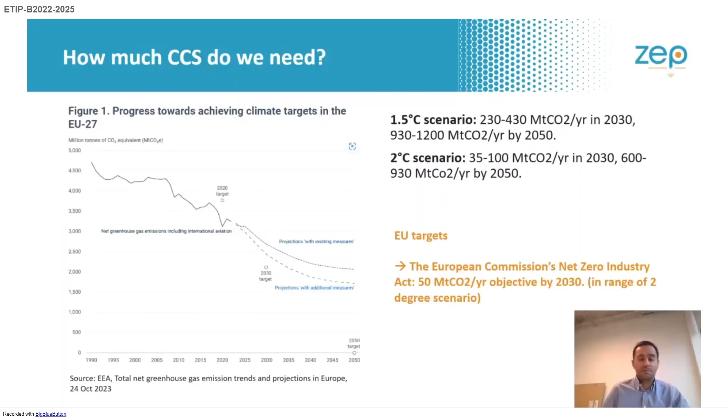So how do we get to this 50 million tons, and then potentially later hundreds of millions of tons of CO2 storage potential in Europe? From a geological perspective, entirely doable. We can actually store probably billions of tons of CO2 into the ground in Europe very safely, in very good geological formations, including in member states where currently the local population is hesitant about such solutions. I mentioned Germany, I mentioned Austria, I mentioned Spain, for instance.

So what is very important is that we have a cross-border European CO2 infrastructure, and that can really allow the CO2 emitters across Europe to connect and secure CO2 storage. Secondly, as with many European policies or market developments, there should be an enabling policy framework, making it economically feasible for companies to invest in all parts along the CCS value chain.

Thirdly, we need incentives to really support the timely large-scale deployment of all parts along the value chain, including but not limited to revisions of the ETS directive, which has now happened, and that the EU and national funding programs are coherent and coordinated. There's now some efforts on that in the STEP regulation, but more can be done here.

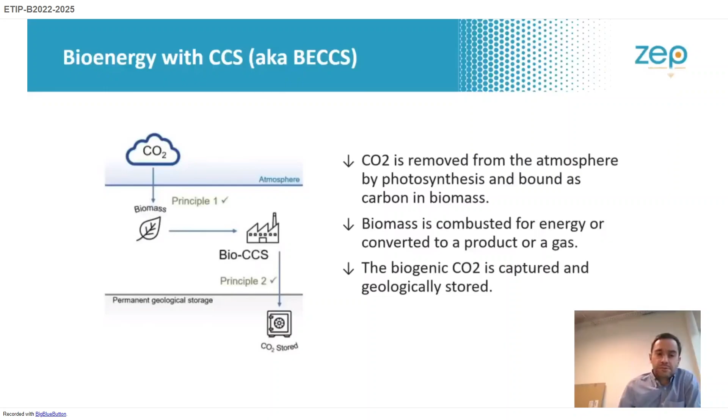So what is the goal of the Commission? The Commission wants to have a specific goal to remove and store CO2, 5 million tons of CO2 from the atmosphere annually by 2030. So this is not the process from the normal carbon capture.

For instance, if you burn or create cement, the cement industry is a very large emitter of CO2 because of the carbon content in limestone that is burned at 1400 degrees. No, we're really talking here about the removal of CO2 from the atmosphere, and BECCS can actually be the stepping stone for that.

Currently we're talking about 5 million tons as a target, but actually more than 200 million tons of biogenic CO2 is emitted annually in Europe. Where does this come from? From power and heat generation, but also the pulp and paper sectors, and biogas. So here there is really a lot of potential. I'm not sure what percentage comes from waste incineration, because I know the waste sector has a lot of carbon content in there, but this is something maybe we can discuss later.

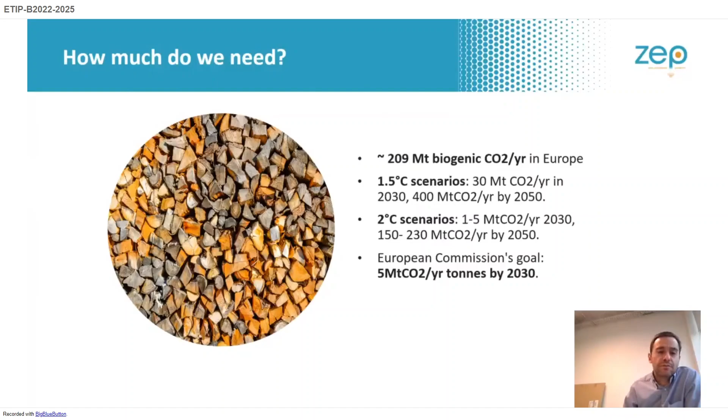We have gaps in the infrastructure. There's also a limitation in the sustainable biomass stream. We have questions about conflicting usage of the biomass, social acceptance, and also the political feasibility. So on paper and in theory it could work, but in reality there are lots of hindrances to full development of BECCS, bio-CCS, without placing a further burden on our planet.

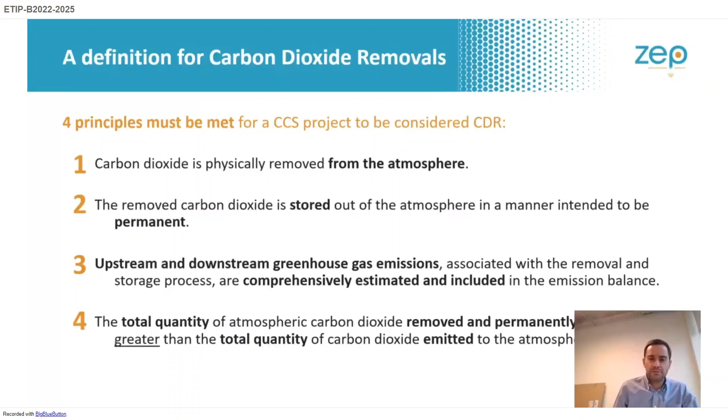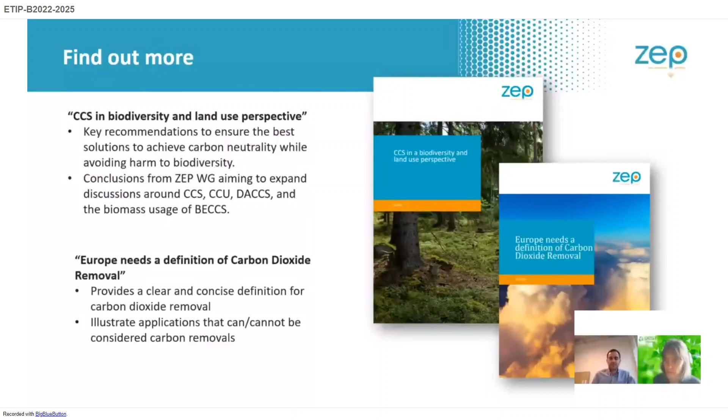I'll skip the rest here since we don't have much time. If you want more information, you can always contact us. We recently launched, as ZEP - Zero Emissions Platform - a report on CCS and biodiversity and land use perspective, and another one on the definition of carbon removals that I just briefly mentioned, which the Commission is now also working on. I'd like to leave it at that. You can see my email address, and I'm looking forward to the other contributions and the discussion in about an hour. Thank you.

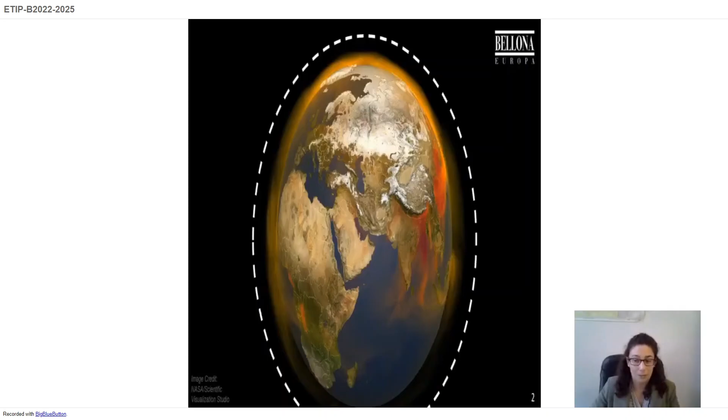So to think about bio-CCS first in the CDR portfolio, just to remind you, considering the latest developments at COP, action to cut emissions has been particularly slow. We're not on the path to keep global warming below 1.5 degrees at the moment.

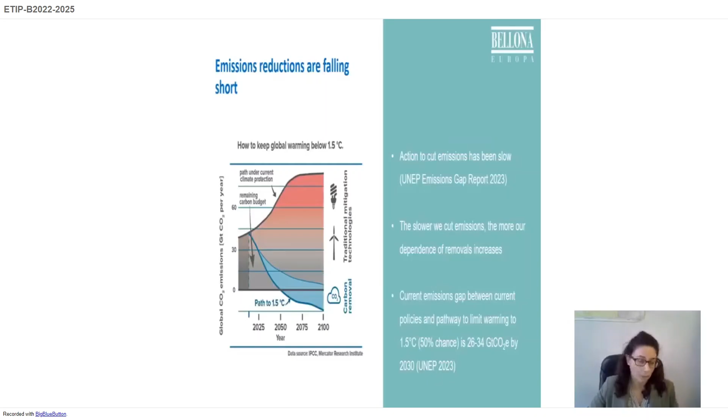There are significant emissions gaps between current policies and the pathway to limit warming to 1.5 degrees. Most of the work to decarbonize society will happen through traditional mitigation technologies, but there will also be a small role for carbon removals to tackle residual emissions in hard-to-abate sectors. The remaining carbon budget is being rapidly consumed, so we need to think about how to deploy these technologies at scale as soon as possible.

So there are many different approaches, different ways to capture and store the carbon, but these all come with different resource requirements for land, energy, natural resources, as well as different lengths of storage or permanence. For example, in geological formations or minerals, we're talking tens of thousands of years or even longer. In biomass, vegetation, soils and sediments, you're looking at more decades to centuries.

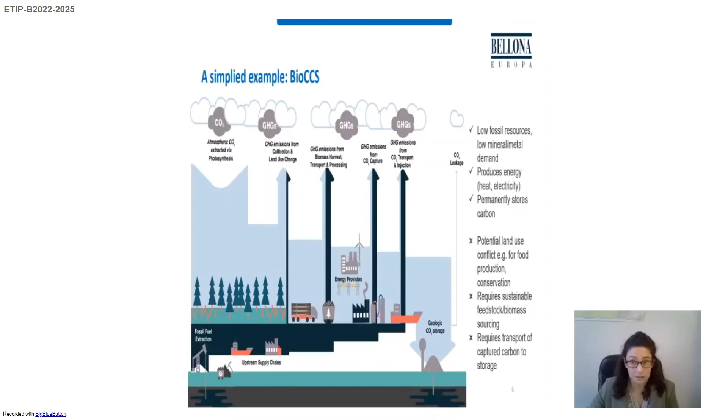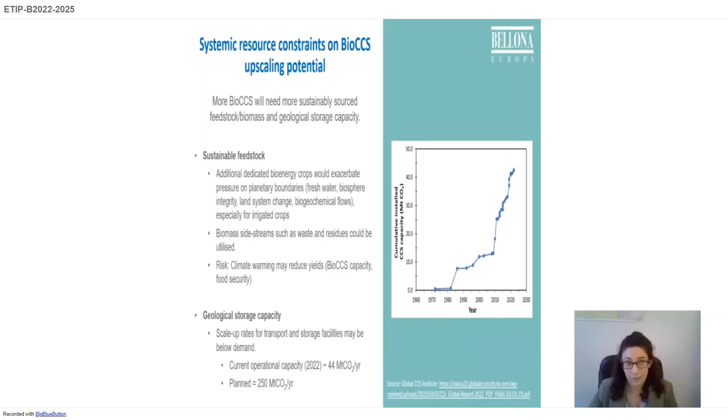But this could, of course, be a bottleneck potentially for the scale-up of bio-CCS. In general, there will be a lack of storage for carbon, both in point source capture as well as using CCS related to bio-CCS or DAC. So what about bio-CCS today? Current planned applications include, for example, heat power plants, cement plants, pulp, paper mills, and hydrogen production.

But in terms of thinking about what would make a credible bio-CCS project, we at Bellona think that we need to think about the sustainable biomass streams being put into bio-CCS - they should be used primarily to replace the use of fossil fuels. We don't want to use biomass here to displace the use of renewable energy sources, and we don't want to use biomass as a way to replace, for example, where direct electrification could be more efficient. And then if you think about it, where could you apply bio-CCS as a priority?

We already use biomass in many different ways. We need to think if we're using biomass in the best way, and to think about a cascade of biomass combustion, for example between heat generation, electricity, or other sectors, because it will be limiting in terms of the amount available. We want to ensure it doesn't get used for sectors where zero carbon alternatives such as direct electrification already exist.

I think I can hear somebody with the microphone on. If you could put it on mute, that would be much appreciated.

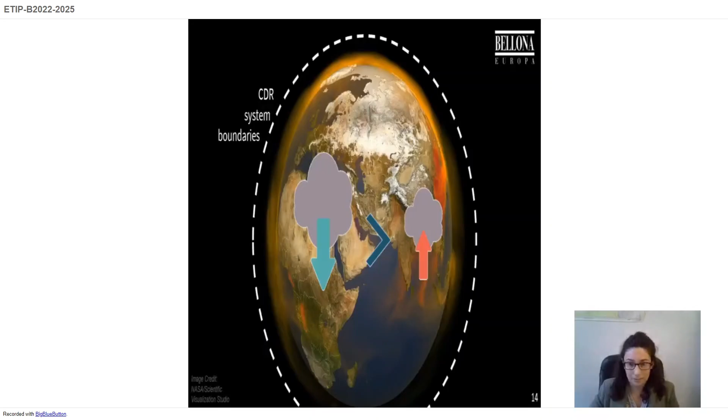When we come to the carbon, we need to think of the CDR system, or carbon dioxide removal system, boundaries and ensure that whatever activity we are doing, we are removing more carbon than is being emitted through the activities themselves, so more is being sequestered and stored rather than remaining in the atmosphere. This ensures a physical climate benefit, minimizing greenhouse gas emissions. I'll pose a question to consider, and discuss afterwards, if we need to revisit or revise the zero rating of biomass.

Current capture is about 2 million tons of CO2 per year, but less than 50% of this is stored in dedicated storage, and some is utilized in different ways. Bioethanol is the primary use of bio-CCS as far as I'm aware. We need to ensure that whatever incentives we have, the carbon from biomass utilization is captured, and that the overall goal and incentives support emissions reductions and preventing carbon being emitted to the atmosphere to begin with.

This is related to the zero rating, because these are usually not tracked at the moment in terms of how much carbon is emitted through combustion, since it is seen to be basically carbon neutral, this biomass that is utilized. So there isn't really an incentive to actually capture the carbon from that biomass to begin with.

I want to summarize these systemic considerations. Bio-CCS will be one of numerous ways to remove and store carbon permanently, so we need to think about it within the Earth system for both its benefits and impacts. In terms of its contribution to the carbon dioxide removal portfolio, we need to think about what biomass or feedstocks we allocate that are sustainably produced for that purpose, consider potential limitations on upscaling due to pressure on planetary boundaries already under extreme pressure, and ensure it's used to displace fossil fuels rather than replacing other renewable energy resources.

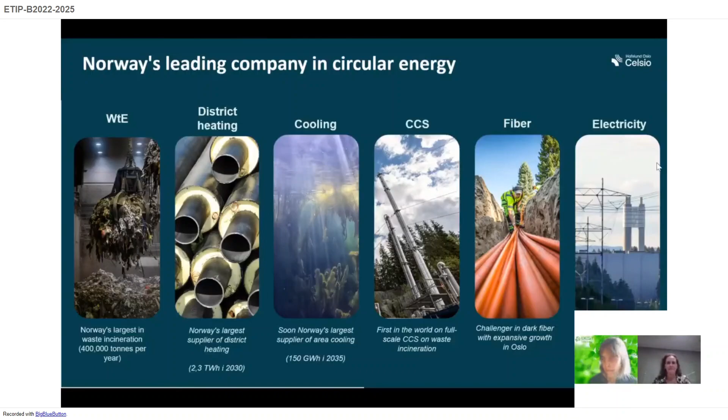To look at the big picture, let's start with waste. Waste is definitely one of the world's biggest climate challenges, and maybe also one we don't talk enough about.

With cities growing and people moving to cities, we see waste amounts increasing. Even though we're working to reduce it, waste is increasing. 2 billion tons of waste is produced every year, estimated to increase to about 3.5 billion tons just by 2035. This is a huge problem.

With landfills being the main solution for waste handling in the world, methane from these landfills is accountable for more than 20% of the global warming effect. This has also been a topic at COP right now, to reduce methane emissions, which is a very potent climate gas, much stronger than CO2.

So we need to avoid methane emissions from landfills, but also work to reduce, reuse, and recycle waste to keep resources in the cycle. For the residuals that we cannot or don't want to recycle, we need to incinerate with energy recovery. By adding CCS to waste-to-energy, we can both reduce fossil emissions and remove the biogenic emissions from this process.

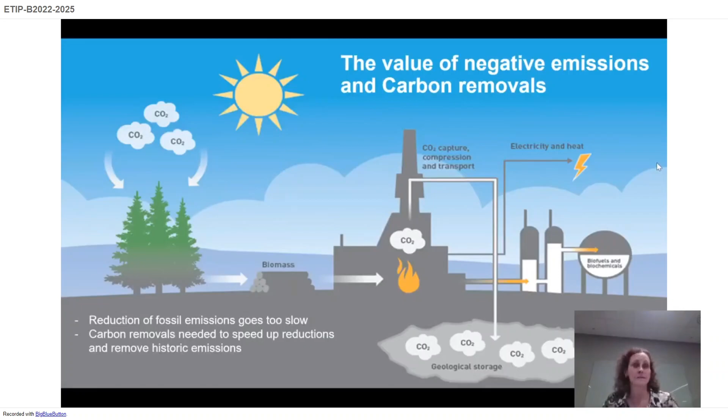The main action to reduce climate emissions is obviously to reduce fossil emissions, but this is going way too slow. That's why we also need carbon removals to speed up reductions and remove historic emissions. With energy from waste, about 50% of the CO2 emissions from this process being biogenic, this industry can actually contribute substantial amounts of CO2 removals.

Now let's look at our project. We are still hoping, even with a few setbacks the last year, to be the world's first full-scale CCS project on waste-to-energy. We are part of the Norwegian value chain for carbon capture and permanent storage of CO2, called Longship. In this value chain there are two capture projects, one from cement and one from waste incineration, which is our project. We started construction in 2022, but as mentioned, we've had some setbacks. I'll get back to that.

So we don't really know right now when we will conclude or start operations, but the goal is now 2028. We're planning to capture 350,000 tons per year of CO2, which is 90% of the total emissions from this process.

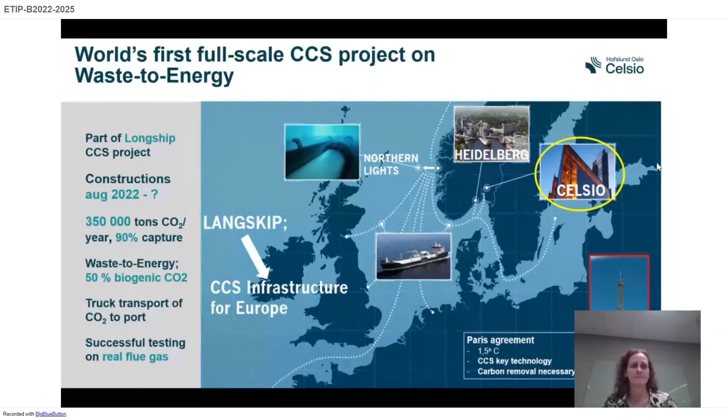With 50% of this CO2 emissions being biogenic, it's a large potential for carbon removals. This project is a public-private partnership with contributions both from the Norwegian state, from the city of Oslo, and from the company itself.

But from the state support is deducted CO2 taxes and also possible income from carbon removals for the first 10 years, which is the support period.

These numbers are already outdated, as I mentioned, since we have had to pause the project, due to cost increases or increases in cost estimates. We started the project last summer, 2022, and finally reached an investment decision with new owners, starting in August 22.

However, during the fall, due to inflation, really high inflation, high power prices, high interest rates, and a very bad currency on the Norwegian crown, we suffered cost estimates that were skyrocketing.

In addition, we had complexities in the project, including needing to change the location at the port of Oslo, needing more area and land at the site, and challenges with the local power demand. With all these complexities, we also needed to increase our own organization, which caused an increase in cost estimates that led us outside the budget frame.

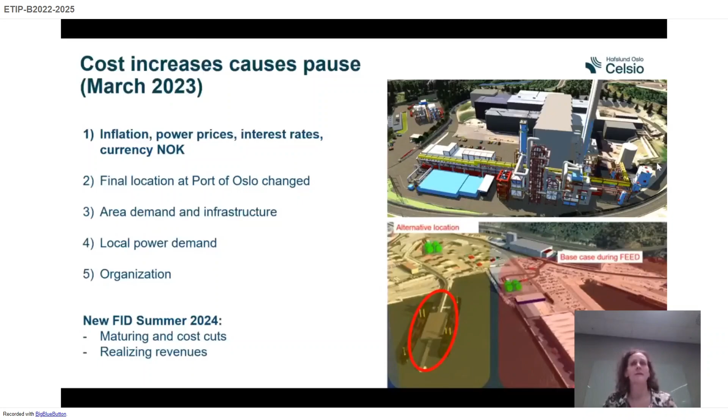So we paused the project in March this year, and the goal is to restart it with a new investment decision next summer. During this pause, we are working on maturing the immature parts with land and at port, but also working to find revenues to cover this substantial company contribution of more than 400 million euros.

As part of this change, we have also decided to conduct a new FEED study, executed by Aker Carbon Capture and Aker Solutions. The FEED will go until June next year, with the goal to have an investment decision next summer, based on Aker Carbon Capture's Just Catch module of 400,000 tons.

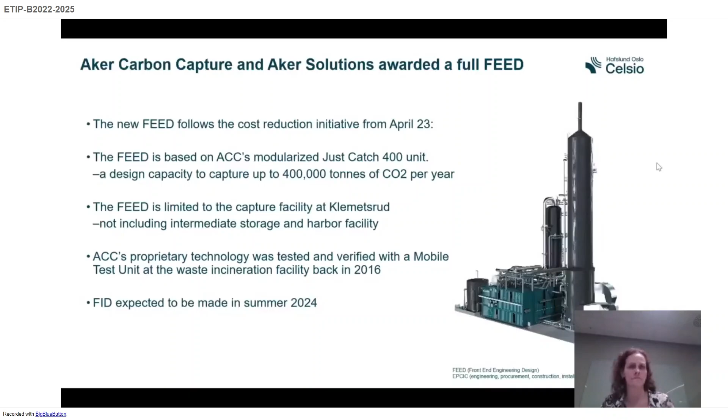The key enablers for our project are partial state funding and a contribution from the city, because these emissions are actually the largest point emissions in the city—this plant accounts for about 17% of the city's emissions. So capturing and storing these emissions will contribute to the city reaching its climate goals.

In addition to this, avoided costs are part of the picture. We have a separate CO2 tax in Norway, and we're also inbound in the ETS system from 2028.

On the revenue side, carbon removal certificates will be very important to succeed with a new investment decision. We see market prices today of around 200 euros for bioenergy with CCS, but there is a need for a framework and methodology to address issues like the biogenic content being measured and documented, certain traceability on the waste side with requirements for sorting, and that the CO2 is actually stored permanently.

If we look at how this market will develop, we truly believe this will be an increasingly important market in the years to come. This is from the Norwegian Center for Scientific Research, which has stated that it's not even theoretically possible to reach the 1.5 degree target.

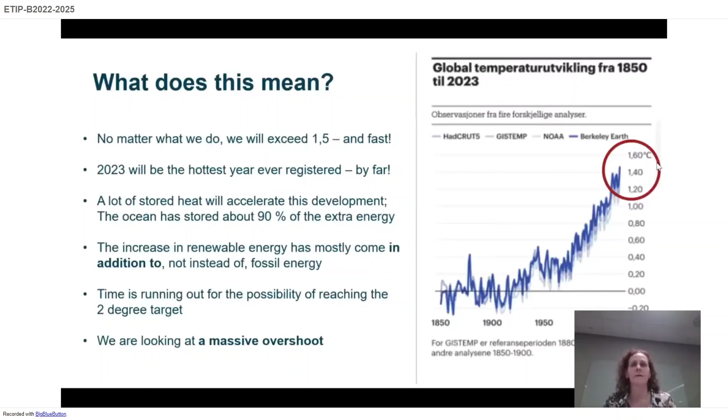Time is running out even for the possibility to reach the 2 degree target. We're looking at a massive overshoot, and this is also a reason why we know carbon removals will be of large importance to reach the climate goals—both to speed up the reductions, to balance the hard-to-abate emissions at net zero, and to get back to levels below 1.5 degrees after we reach net zero.

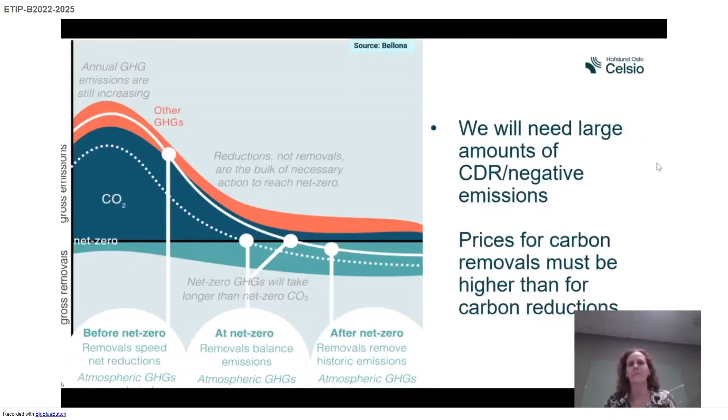But it's important that the prices for carbon removals must be higher than the price of reductions, because this cannot be the easy way out. We first and foremost have to reduce the fossil emissions that are possible to reduce, and then we need to add the carbon removals on top of that.

With regards to waste-to-energy or waste incineration, we know that it's possible to measure the C14 component in the flue gas to actually document the exact level of biogenic CO2. So this is not a big challenge.

It's also documented that just the capacity we have today on the waste-to-energy side in Europe can remove 35 million tons of CO2 if it is equipped with CCS. So this is a substantial contribution to Europe's climate goal.

And also with waste incineration, we don't really need this difficult discussion when it comes to the origin and sustainability of the biomass, because this is low quality waste that has been sorted. It doesn't really have any other use. So it's biogenic CO2 just waiting to be captured.

We see that customers today are the early movers. They are content on securing future volumes because they know that demand will rise, and they want to secure their options by entering this market early.

Our goal is to realize parts of this BECCS volume from our plant before the new investment decision. So we are working really hard, contacting customers, potential customers, and everyone who should be a customer in order to get this market started.

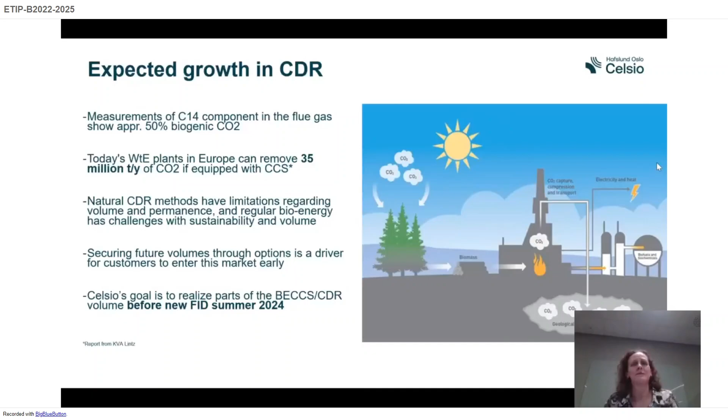To conclude, waste-to-energy with CCS is actually a 3-in-1 solution, which is what we in Norway call a kinder egg. It's a chocolate, it's a surprise, and it's also a toy. For our part, it provides safe and sustainable end treatment for the unrecyclable waste that has to be taken out of the cycle. It also produces heat and electricity, and it contributes to removing CO2 from the atmosphere.

As soon as we have the framework in place to actually include this market or these certificates in the compliance market, it will really be possible to reach high volumes in this market. Thank you.

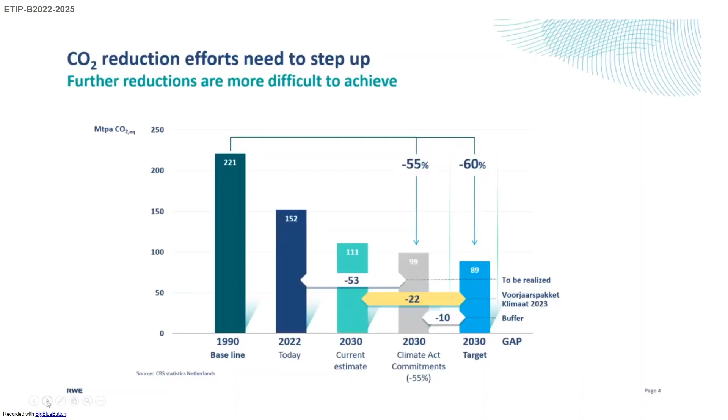But what is left over is usually the lignin-based stuff with a lot of carbon in there, and this is actually what we can burn in our power stations. So what we're doing is converting our power stations, Amer and Eemshaven, from coal to 100% sustainable biomass. That, of course, is a combination of two things: going from coal firing to biomass firing, but at the same time, or shortly afterwards, we're also adding carbon capture.

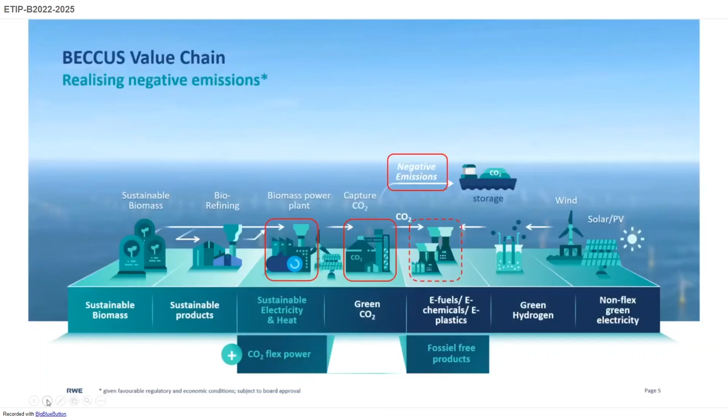The first step has been taken: it's at 15% biomass already. We have the permits in place to go to 30%, and currently we're working on the 50% and 100% conversion steps. We're also developing the carbon capture plant and how to ship it out, to be able to generate 8 to 10 megatons per year of negative emissions, and also supply green CO2 to the local industrial environment, which is quite close to the power station.

And close to Delfzijl also. Then we have one power station in the south, the Amer power station, Amer 9, which also started off as a coal-fired power station, commissioned in 1993, so it's 30 years old, which is still quite okay and young for a coal-fired power station that can easily go with the right maintenance to be 60 years old in the end.

So what we're doing here also is a single unit of 600 megawatts electrical, which is sustainable and flexible power as well. In addition, we also have 350 megawatts thermal heating capacity for the local district heating, covering more than 50,000 households in the vicinity of Geertruidenberg.

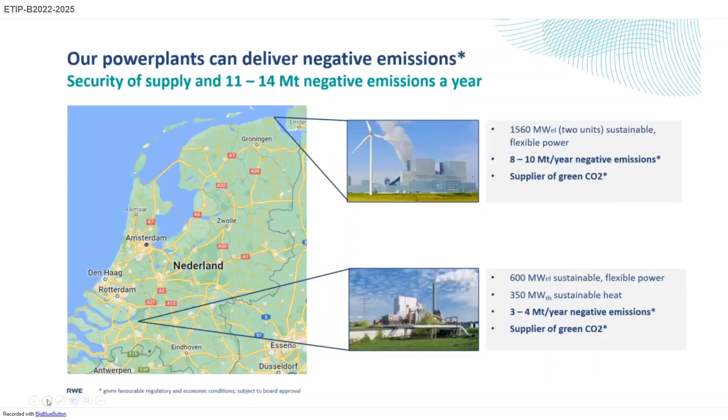If we go to the next slide, I also brought some visualizations of the power station. This is our Eemshaven power station, all the way in the north of the Netherlands. In the middle of the picture, the blue structures, that is our Eemshaven power station as is. In yellow is some existing biomass equipment for the 15% conversion, and in red and green is the 50% and 100% biomass conversion steps, which consist of changing the logistics system with 2 new ship unloaders on the South Quay, where that big ship is anchored in red, transporting biomass into 2 to-be-built biomass silos. These are about 65 meters high, each with a capacity of roughly 65,000 tons of sustainable biomass, from where it's conveyed pneumatically into the power station to be fired.

What you see on the top right side, in green on the former coal yards, is that we will need some dosing of fly ash to get the boiler chemistry right. So this is not coal, but it'll then be fly ash.

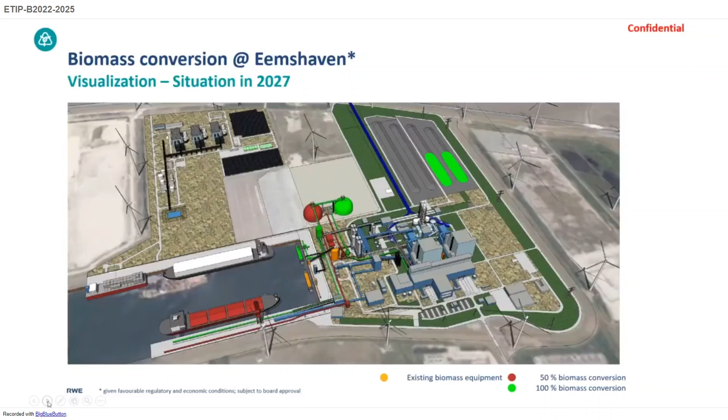If we go to the next slide, this is the situation once we've also added the carbon capture and storage, which is now behind the power station, consisting most probably of 2 trains, where both trains will each have 2 large absorber towers and 4 strippers behind them to capture the CO2 from the flue gas. So this is really the 100% setup. Basically all the flue gas is to be put through, not through the chimneys, but through these absorber towers, which are about 17 meters in diameter and around 110 to 120 meters high.

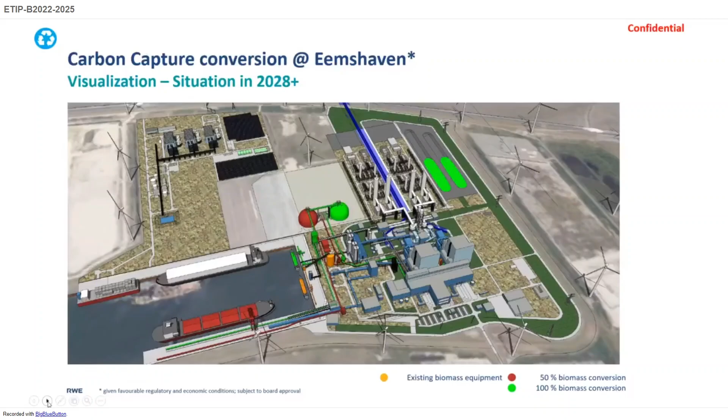If you go to the next slide, you can see that 2 of these chimneys have gone. Basically the back side of the old units of the power station will be demolished, and we will have 1 train with 2 absorber towers placed between the older power station and the newer power station, with 2 strippers after that to get the CO2 out of the flue gas, and then put it most probably into the Delta Rhine corridor, which will take it to Rotterdam and from there to the Aramis network.

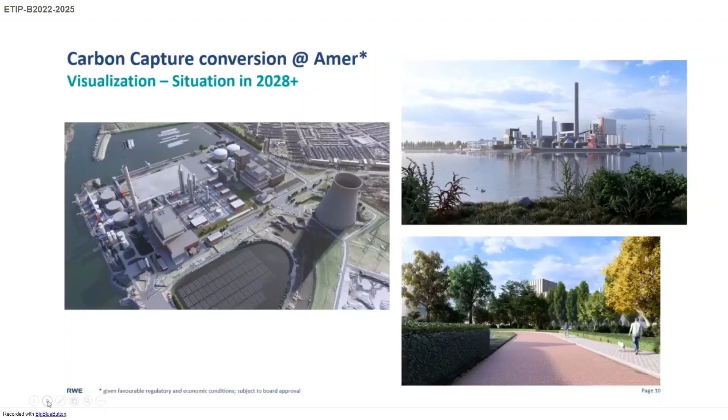And with a total of 14 megatons of negative emissions per year, we can be a significant and relevant part of the solution, not only for Dutch society, but for society in general. I think the last slide we can skip. What I put there is just for those technically interested, a rough overview of how the carbon capture plant works, but I think we will not need this right now.